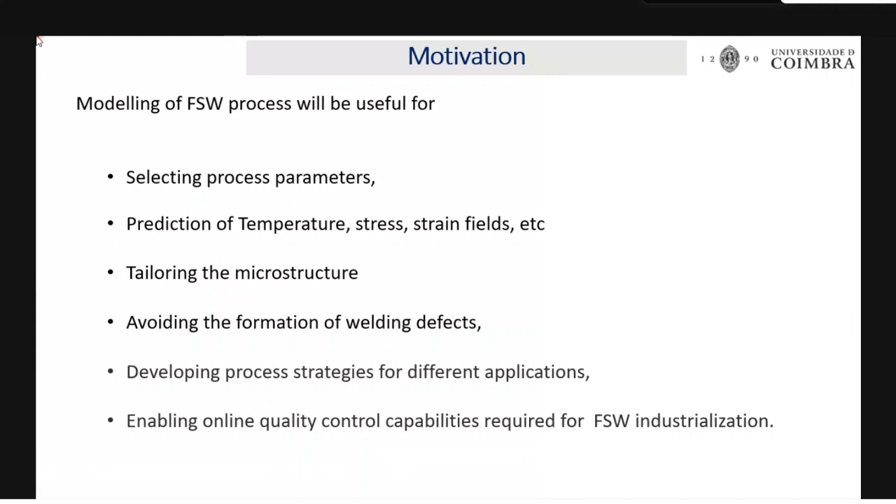So this makes FSW get to the industries in wide applications. Okay, first thing. So now we are moving to how to do the simulation. What are the things you need to know, or what are the procedures we are going to follow? The very first thing is you should know what contact conditions you are going to apply between the tool and the workpiece.

So before knowing what models are available, first I can explain the basic contact conditions, that is sticking, slipping, and the third variant is partial sticking and slipping. Sticking is nothing but the material will stick to the tool under certain conditions, and in slipping, the material tends to slide over the tool. When the material is sliding over the tool, you will have friction.

So friction is the main phenomenon during slipping conditions, and when you have friction, the heat generation is mainly contributed by friction. In sticking, the material moves along with the tool, where the angular velocity of the material and the tool is similar. In that case, plastic deformation plays a major role in heat generation. In partial sticking and slipping, heat generation is contributed by both friction and plastic deformation.

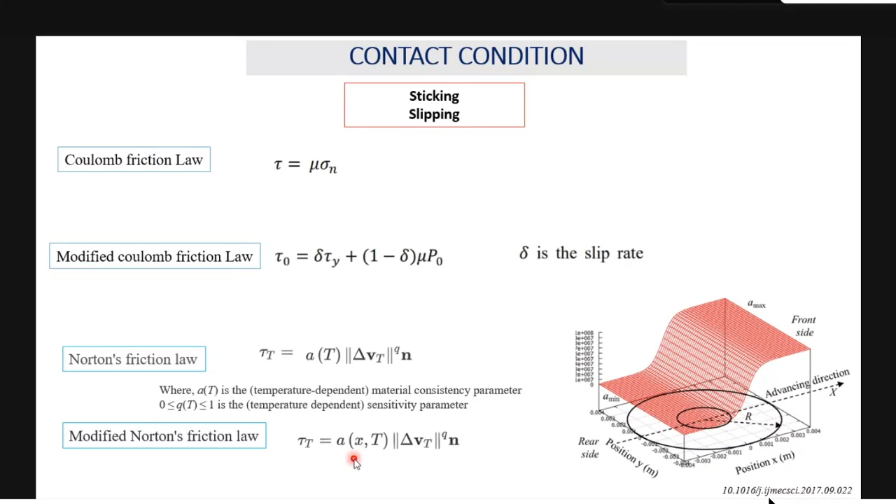And here, by changing the value of A, you can achieve sticking, slipping, or partial sticking and slipping. For example, with a higher value of A you get sticking, with a lower value you get slipping, and with a moderate value you have partial sticking and slipping. So this is about the contact conditions. You can choose accordingly based upon agreement with the literature or with your experimental conditions.

Then the next important thing is the material modeling. If you are modeling a fusion welding process, the only consideration is a temperature-dependent property, because the material property varies linearly or non-linearly with temperature. But in the friction stir welding process, you have a lot of things to analyze, because the material behaves differently with respect to temperature, strain and strain rate. So you need to accommodate all these aspects to capture the real material flow behavior.

There are some traditional constitutive models that show good agreement with experimental conditions. We can choose among them based upon data availability and the accuracy of the model with the experimental conditions. The first one is the Johnson-Cook constitutive model. This is a well-known model, very famous for simulating the hard deformations happening in various processes like compression tests and tensile tests, low strain rate tests and high strain rate tests.

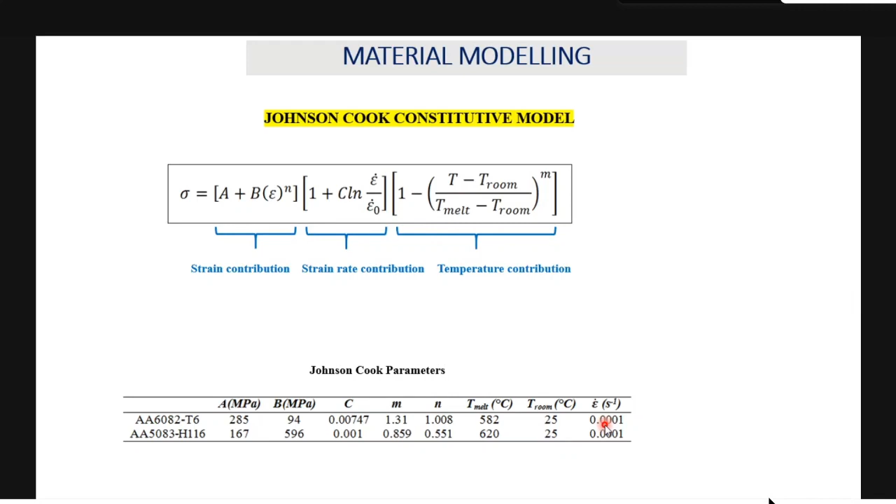The next material model is the Norton-Hoff constitutive model. This is another material behavior model. Here it is a function of the viscosity parameter and the viscosity exponent, and these are not direct values, because the viscosity parameter has further relationships, each with different parameters. Due to time concerns, I'm not explaining much about that. They use the viscosity parameter and the viscosity exponent, which is like strain rate sensitivity.

The next one is the Sheppard-Wright constitutive model. Norton-Hoff and Sheppard-Wright are both models evolved from the Arrhenius equation. They have the same origin, but the representation differs. The Sheppard-Wright constitutive model is widely used, where the effective viscosity parameter is a function of the effective stress and the equivalent strain rate. Further, this can be calculated using the Zener-Hollomon parameter. The Zener-Hollomon parameter is a parameter.

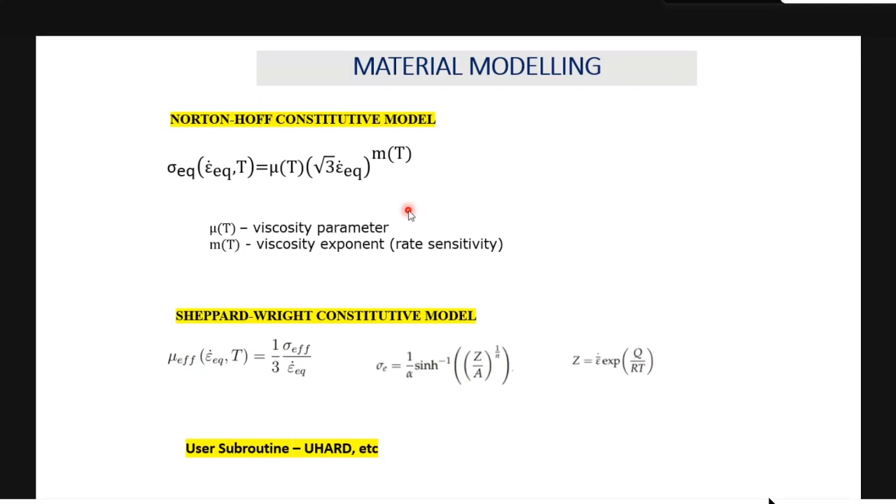Next one is the material modeling. The main one is data extraction. Of course, data extraction is a very difficult one. When you're searching for the data, you don't go directly. You can go for tensile tests, hot compression tests or hot torsion tests performed on a Gleeble simulator. Using the Gleeble simulator, you can simulate with different temperatures and different strain rates. These stress-strain curves will be used, and the data processed for this model. So these are the right strategies for taking the data for building the material model.

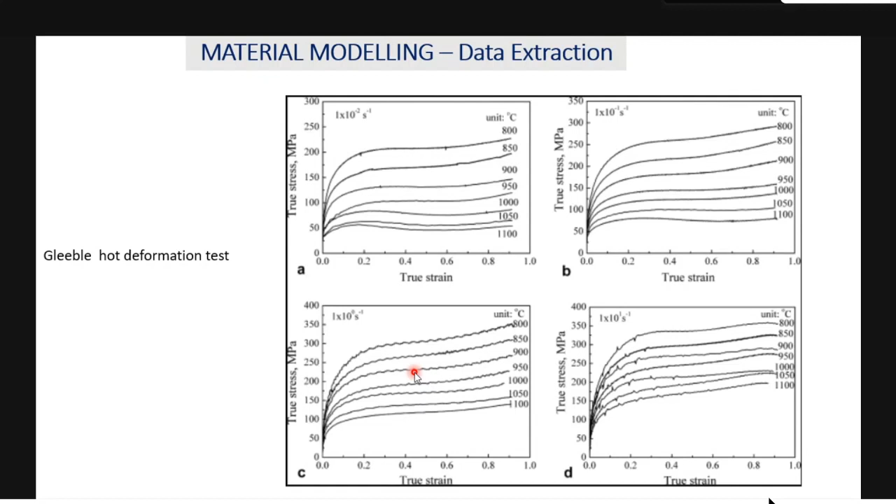Now I'm coming to the mesh part. There are two mesh formulations generally used in nonlinear deformation conditions. One is the Lagrangian and the other is the Eulerian. Let me explain this in a very short way. In the Lagrangian, the mesh moves together with the material, and in the Eulerian, the mesh is stationary, which means the mesh is fixed and the material inside moves freely through it. When you take a model, you have two systems: the mesh system and the matrix system, which is nothing but the material elements.

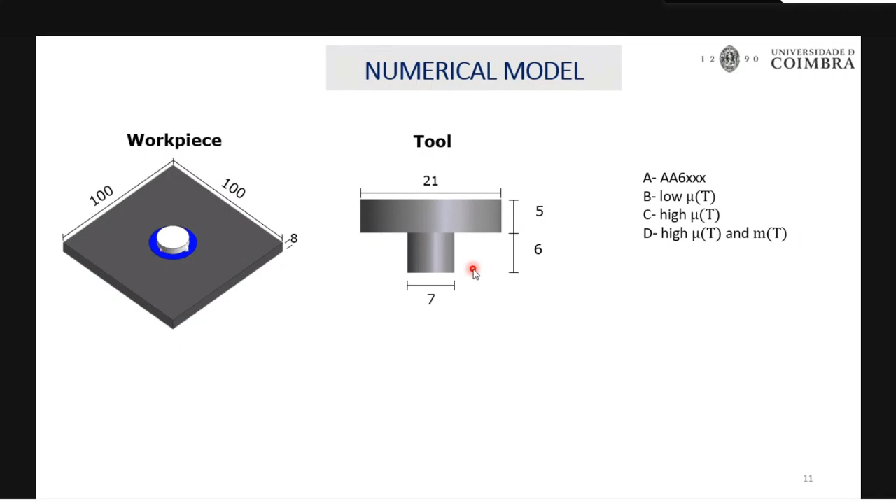And the Norton-Hoff constitutive model is used to model the material behavior, and the friction condition is based upon the Norton friction law. These are the dimensions of the workpiece and the tool used for the simulation. As I told in the previous slide, the main objective is to analyze the influence of material property. So I take AA6065 aluminum alloy, calculate the material parameter values, and use some multiplier of the viscosity exponent, for example multiplying by 2, 3, 4, 5. In this way I change the viscosity exponent value, so I can analyze the influence of the material's plastic parameters. So that is the idea.

So here I lowered the value of mu t, so that I have a new material B. This is a virtual material, not a different grade or something. If a material has this lower mu t, what will be the results? How will the material behave? In future, it can be related with any grade. For example, if tomorrow you have a new aluminum grade with this parameter, you can directly relate this result with that material without doing any material parameter prediction testing. So that is the objective.

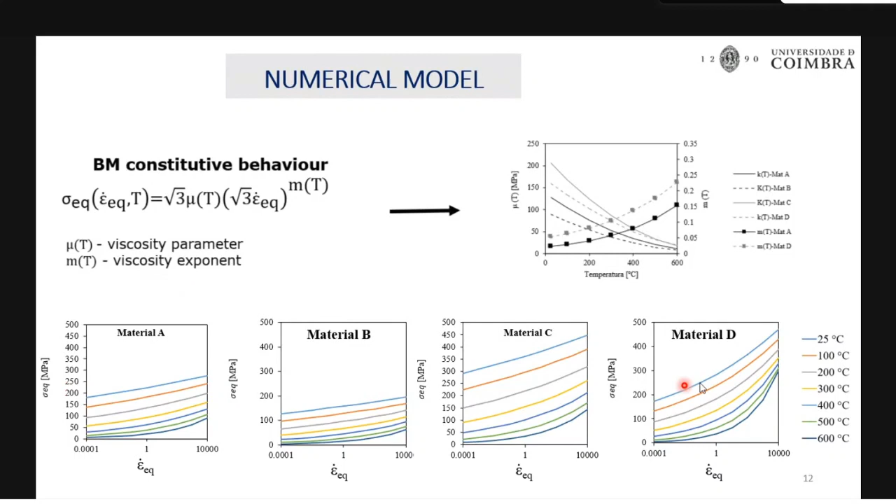Okay, so here you can see the equivalent stress for different strain rates plotted, showing how the material behaves. By changing the viscosity parameter and the viscosity exponent, the flow strength of each material is different. And these are the different process parameters used for the simulation. Keeping 600 RPM constant, I varied the tool travel speed, and with 400 mm per minute travel speed set constant, I changed the rotational speed.

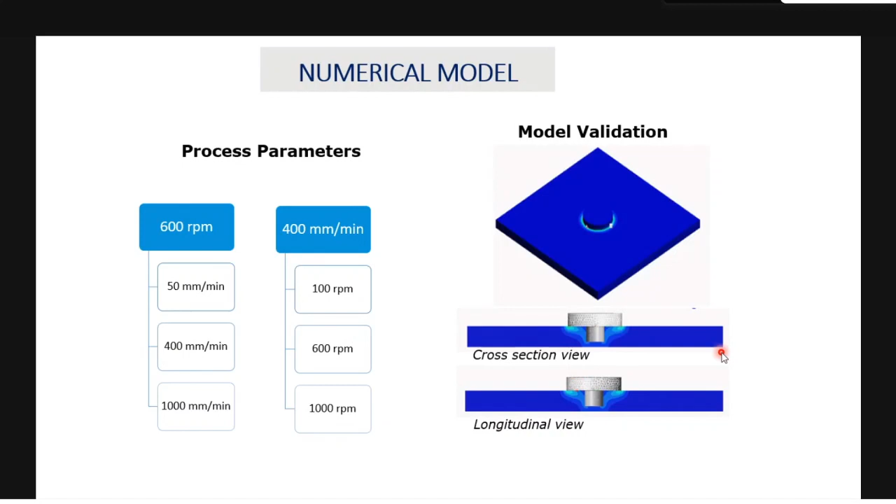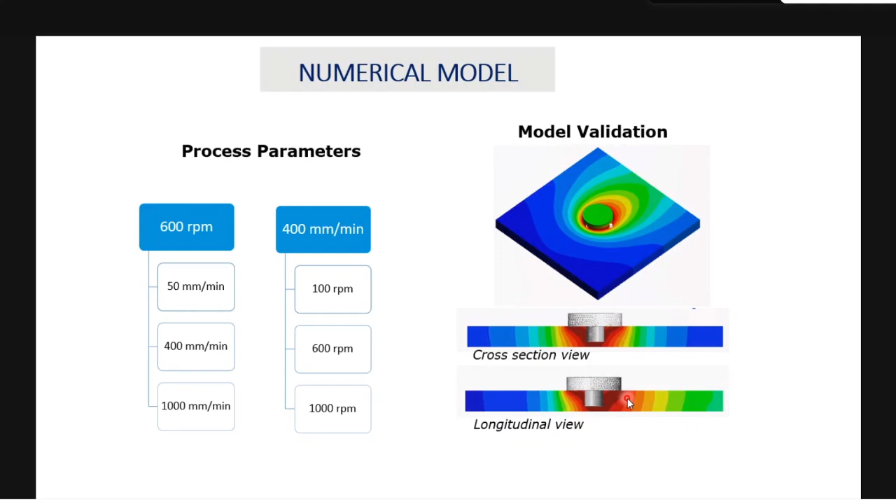So you can see here the simulation results, where you can find this is the advancing side and this is the retreating side. So the advancing side recorded a higher temperature, which is a well-known phenomenon. And here this is the longitudinal section, and this is the tool front end, and this is the rear end. So you can see a wider, higher temperature region at the tool rear, because this region has undergone welding during the previous instances. So you have heat buildup there, so you have higher heat in the tool rear. So these differences in temperature distribution are rightly predicted by using these above conditions.

So next, I'm going to check the influence of strain rate. So here you can see that as the tool rotational speed increases, the strain rate is increasing. So the tool rotation action is highly influencing the strain rate in the material. Whereas while you are changing the tool travel speed, you are not having such influences. When you are coming to the temperature predictions, during the higher strain rate you are having the higher temperature. So as the strain rate increases, we can see that the temperature evolution increases. So this is a very difficult phenomenon which you could not understand or study from experimental means. So only with this finite element analysis can we achieve this.

And you can also see that with respect to the material property, the harder material shows higher temperature because it involves higher torque and higher friction forces. So naturally it is attaining the higher temperatures. And while plotting the relationship between the flow strength and the strain rate, we can see that at the higher strain rate, the flow strength of the material will be very low, which can be correlated with these temperatures.

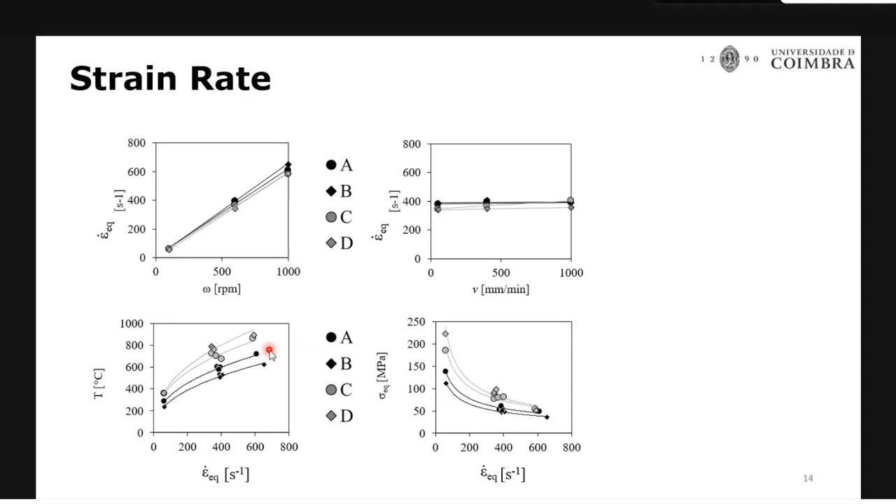So coming to the torque, it is a very important indicator. It is a material response to the tool action. So here you can see that while increasing the tool rotational speed, the torque reduces, which means that when you are having the higher rotational speed, you will have higher temperature. That's why the material softening will be bigger. So the flow resistance will be lesser, so that the torque will be lower.

And the tool travel speed is having a lower influence on this torque, and when the tool travel speed increases, you can see that the torque will be more because the tool will not be available there to make a complete stirring, and it is too fast, so that the preheat zone will be very small, and the preheat zone temperature will be very low also. So you will have a higher torque in this place.

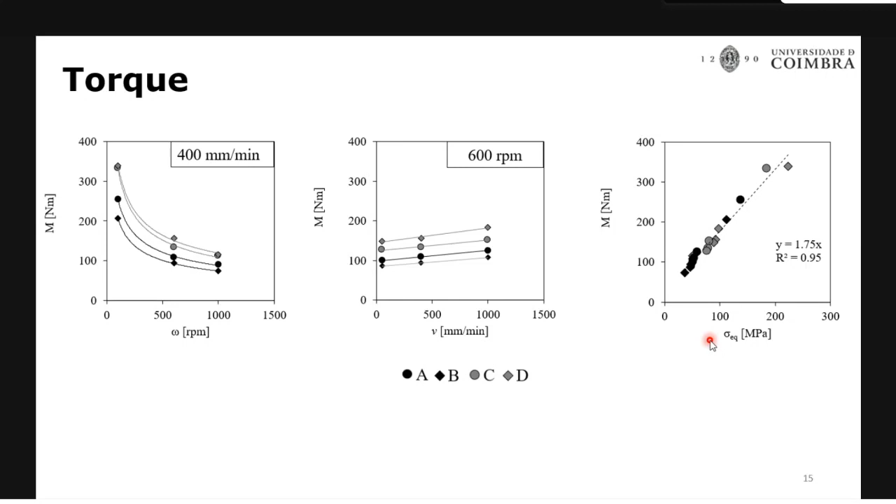So when we are plotting the relationship between the torque and the flow strength, we can find that there is a linear relationship. So the torque or the defect formation will be related to the flow strength. So if you are going for a higher flow strength material, you will have a higher possibility of defects, and we can also say that you may have a lot of problems with tool damage. Okay, and these two have the relationship. Why does this lower flow strength have lower torque? Because you are having a higher rotational speed there, and you will have a higher temperature there. So everything is agreeing accordingly.

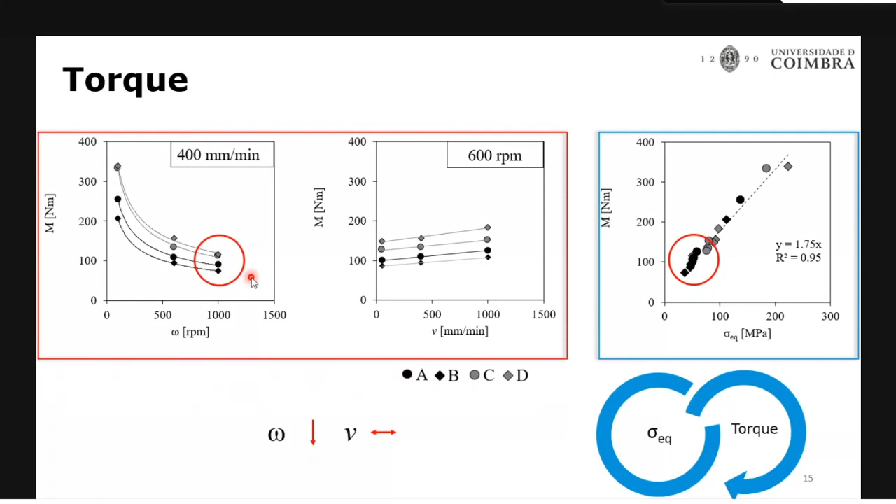Here you can see that this is the lap joint, and this is the center joining surface, and you can see that it is a little bit not clear here in this picture. You have a straight line here, which means that the joining line is still there without any alteration by the tool stirring. So tool stirring is happening.

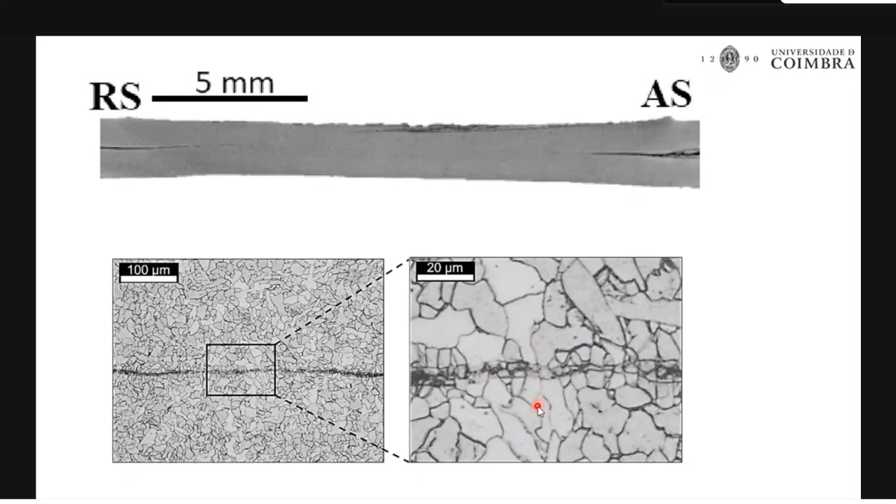So here, using the higher magnification microstructures, you can see that this line remains straight. If the material is flowed, this line will be like zigzag, or this line will be vanished. But here the line remains there, and the diffusion happens between the top and the bottom. So we can understand this with these finite element results.

So the next one is about the defect formations. Here two conditions are compared. One is 600 RPM with lower tool travel speed, and here it is higher tool travel speed. In this case, the pin tool is considered. Here you can see that some micropores are seen here in this advancing side.

And one more thing is, there is an upward material flow in the retreating side. In general, in friction stir lap welding, you will have an upward flow in the advancing side, and a slight downward flow in the retreating side. That is the conventional thing. Due to the upward flow, you will have a hook formation here, and a cold lap here. But for this case, we have a different mechanism.

Here, an upward flow in the retreating side, and you have micro cracks, micro pores, and you are not having any hook defect. So it is an unknown phenomenon. Why it happened, we don't know. So we went for the finite element analysis. So you can see these two animations.

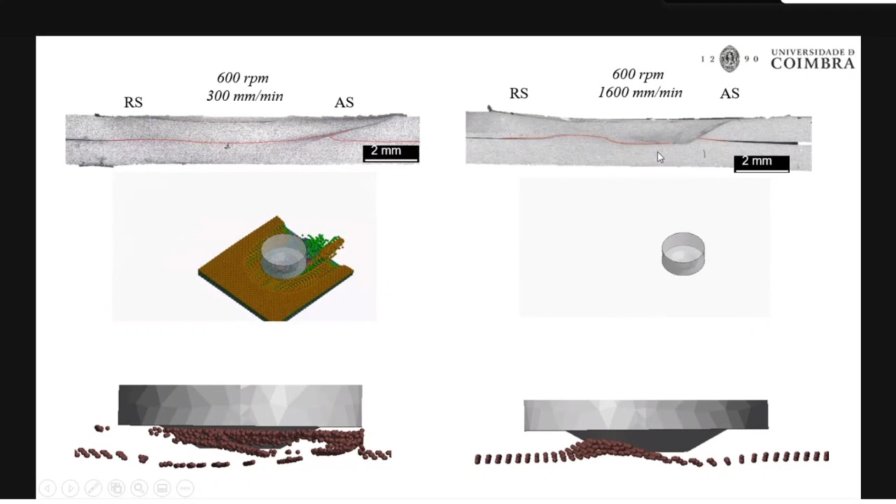Here this material is not rotating around the tool, it is just bypassing the tool. Whereas in this case, the material is moving around the tool. Which means sufficient material flow happens here, whereas here it has not happened. That's why we have an unconventional material flow and defect formation. So even with this finite element simulation, we can predict the defect formation.

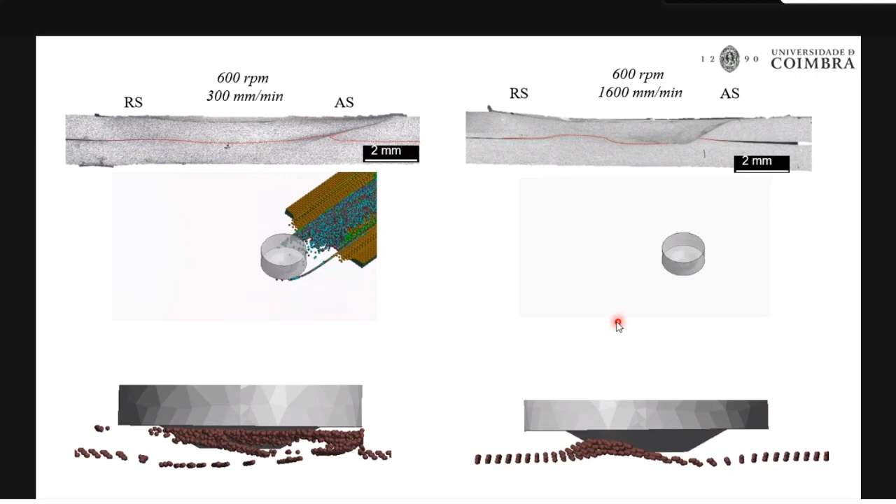So this figure shows the cross-sectional results, where the brown color dots are the markers I used. Here you can see the upward flow, which is very similar, whereas you are having an upward flow in the retreating side. Here it is not sufficiently flowed, so we are having a defect. So in this way, the defect formation is also possible to predict.

Next, I'm going to explain an interesting thing, coupling the finite element results with statistical models. When you talk about numerical modeling, it actually refers to both finite element and statistical. But in general, people think the numerical model is only for finite element or these kinds of simulations. No, statistical is also numerical. So we can use this common factor together to do some magic.

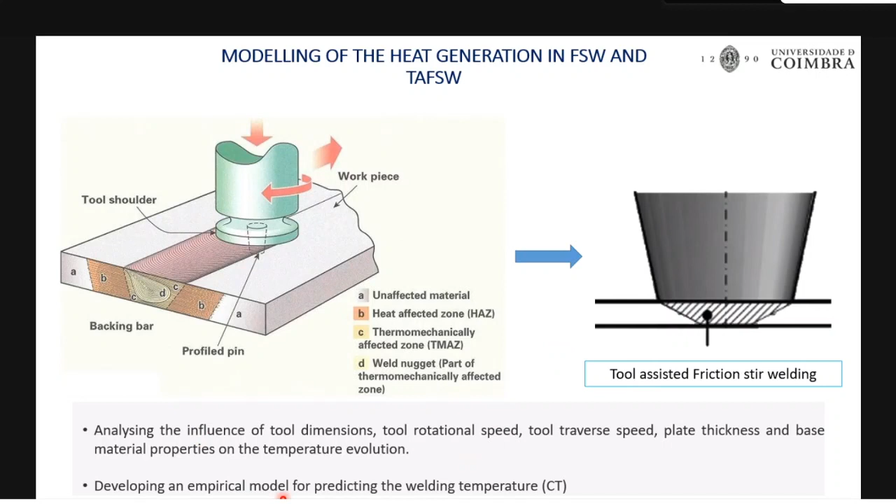So what I'm going to do here is model the heat generation in friction stir welding and tool assisted friction stir welding, nothing but with the pin and without the pin profile. Along with that, I'm going to develop an empirical relation model for predicting the welding temperature. It is a bit complicated, so I represented it in the flow chart.

First, I'm doing big data analysis, nothing but the collection of literature. From the literature, I'm identifying what tool dimensions people are using to weld. I'm using a parameter G to combine all the tool parameters. Then I'm taking the process parameters used in the literature, and doing the finite element analysis. Then with that result, I'm developing an empirical relationship.

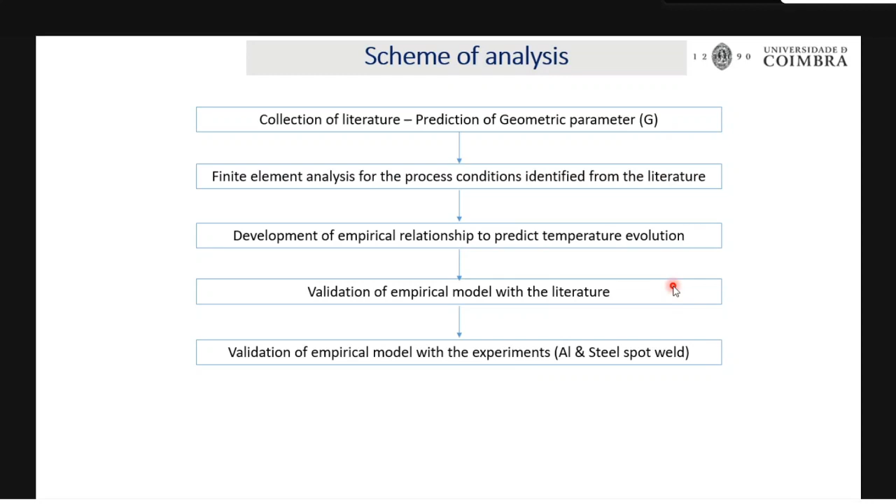Then I'm going to validate with the literature, and then experimentally with aluminum and steel material. This analysis up to here is for linear welding. And I'm checking the robustness or reliability of the model for spot welding too. So let's see that. Nearly 300 papers were collected on different aluminum grades, and these are the parameters I identified from the literature.

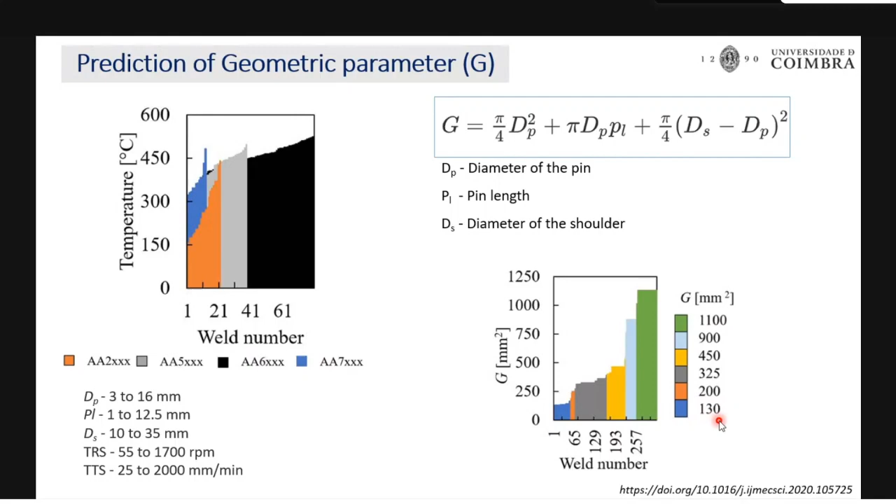And this is the G parameter, and this uses the pin diameter, pin length, and shoulder diameter. I calculated the G parameter, and I found that people are using the G parameter from 130 to 1100 mm square. So I'm using that G parameter for the numerical simulation, and these are the details of the numerical simulations which were discussed previously.

And these are the tool rotational speeds which I identified and selected for the simulations from the literature. So here also I made simulation results of temperature analysis. Here you have a non-symmetric temperature distribution, which is very similar to the microstructures.

And coming to here, we can see that as the tool rotational speed increases, the temperature increases, and similarly as the geometry parameter increases, you have the higher temperature. So this can be related that when the tool dimensions increase, you will have more contact area, more friction, so you will have this higher temperature.

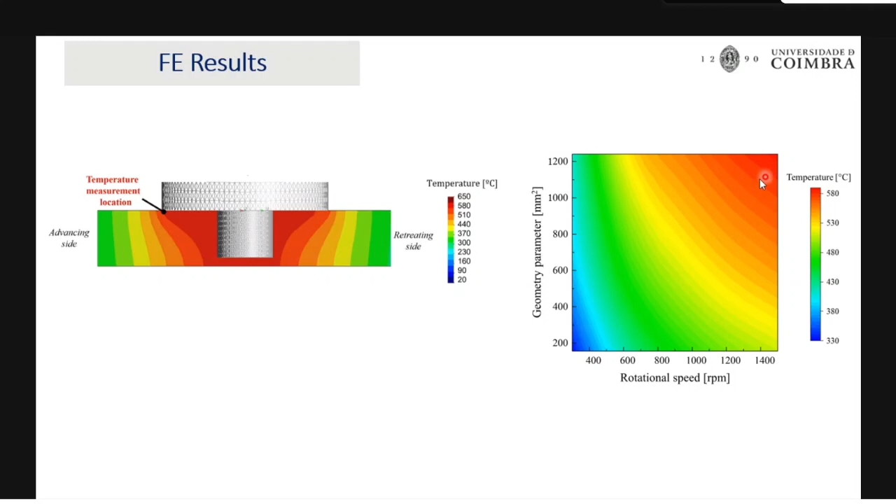So coming to the process parameter and temperature evolution, here also the shoulder diameter and thickness are compared. So here as the plate thickness increases, you are not having the higher temperatures, only the lower thickness have higher temperatures. This is the reason why the heat will be lost from the contact region or from the stir region, because it is a thicker material. So the heat loss will be higher due to the heat conduction.

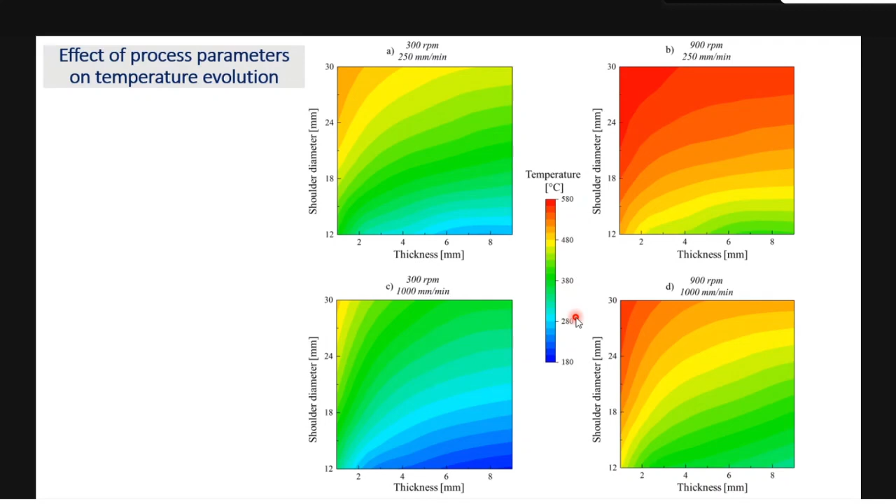And here you have higher rotational speed, and here you are having lower rotational speed. So on comparing, the higher rotational speed results in higher temperatures. So I'm not going into much detail about the process parameters. These are the well-known things. I'm just trying to convince you that this is possible with the finite element.

Then coming to the main aspect, the development of the empirical relationship. So how I developed an empirical relationship. Here I use the product of the thickness and the tool travel speed, because these two are involved in heat loss. When you are having slow welding, you will have a different heat loss, and if you are going for faster welding, you will have a different heat loss. So I'm just using the product of that. Then I plotted the temperature.

Then as the G increases, the temperature increases, which shows that the temperature is directly proportional to G. So I introduce G in the numerator, and as the tool rotational speed increases, the temperature increases. So I'm using G and omega in the numerator. In this way, the coefficient of temperature is predicted. But this is not sufficient to predict the final temperature.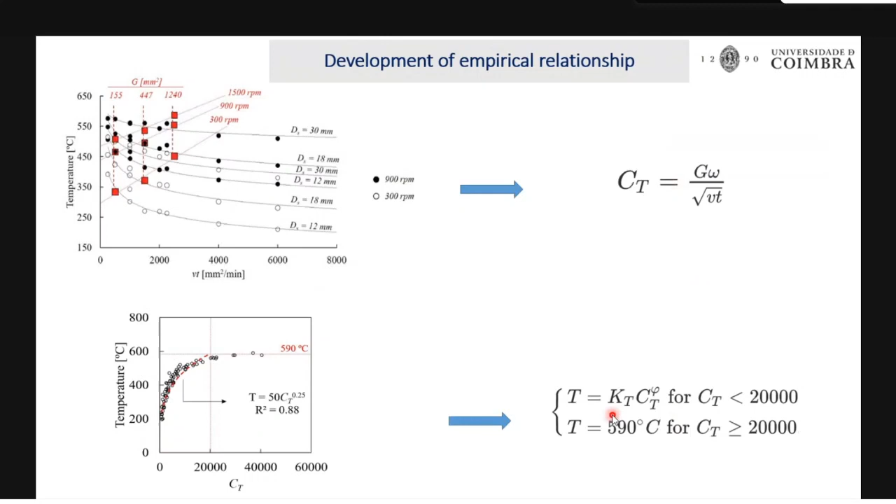And in order to get a better fitting, I also multiplied this KT and this phi value with a multiplier, because each author uses different measuring techniques and different measuring locations.

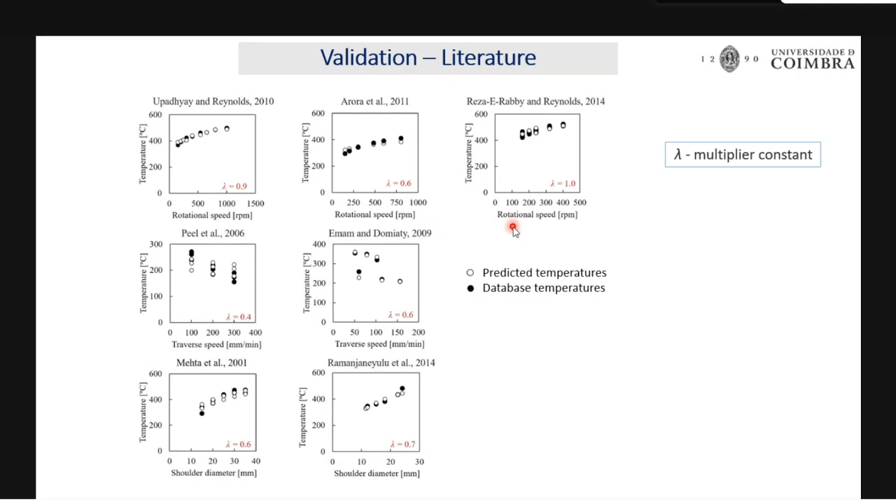So in order to compensate that error, I introduced that. So now I am going to check the robustness of this model to the spot welding. So when we are going for spot, you don't have the pin. So the pin-related terms are removed from these equations. And one more thing is, when you are going for spot welding, you don't have the travel speed. So the term V is removed from the equation.

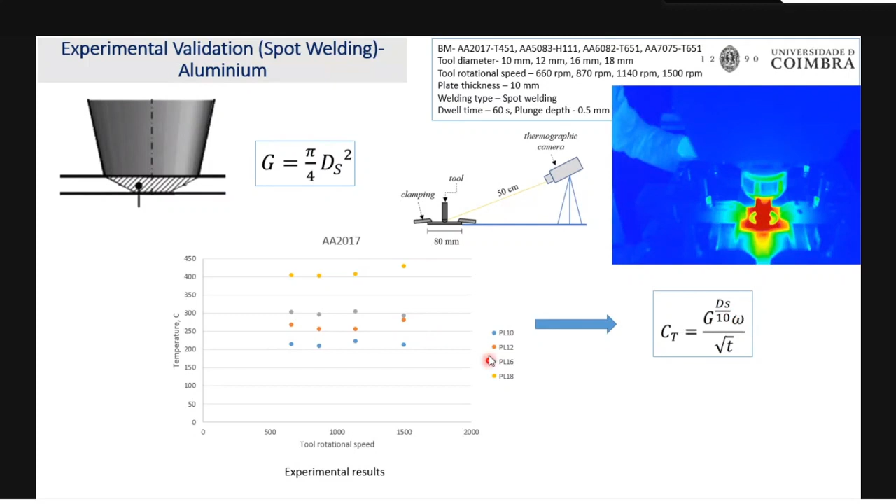And here I used ds by 10. The 10 is the thickness which I used here, and ds is the shoulder diameter. So why I introduce this is because I need to give more weightage to the geometric parameter. So here you can see that experimental condition, these experimental results were captured by using this thermographic camera, what you are seeing here. So here you can see that as the tool rotation speed increases, it is not increasing so much, whereas as the shoulder diameter increases, it is increasing a lot. So in this way, in order to give more weightage to the tool dimension, I introduced this term.

Yes, we checked that. Here you can see that as the tool diameter increases, temperature increases, and as the rotational speed increases, the temperature increases. So when you are going for steel, the influence is equal for tool diameter and the rotational speed. So I removed this, the diameter divided by 10. So this is the simplified equation, and I generated new equations for steel, because for steel, the CT will be different with respect to the temperature. And here the maximum solid state welding temperature of the steel identified is 1100.

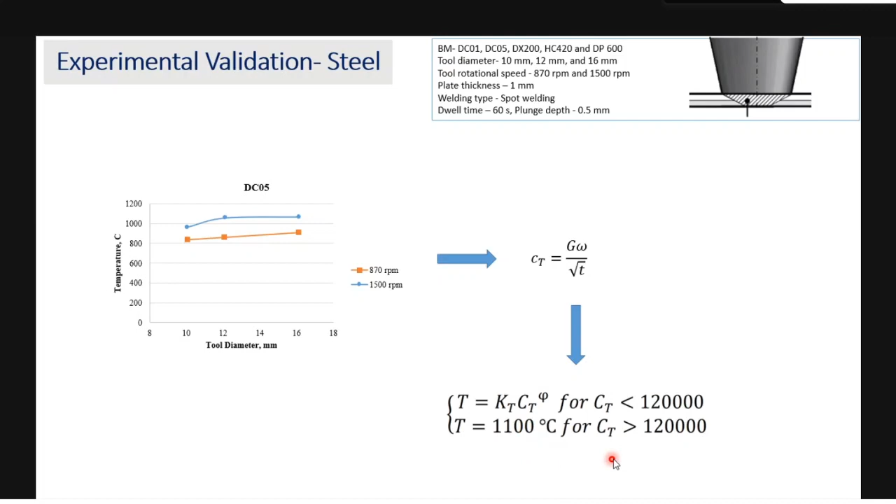Am I audible? Yes, sir, you are audible. Okay, I heard some noise.

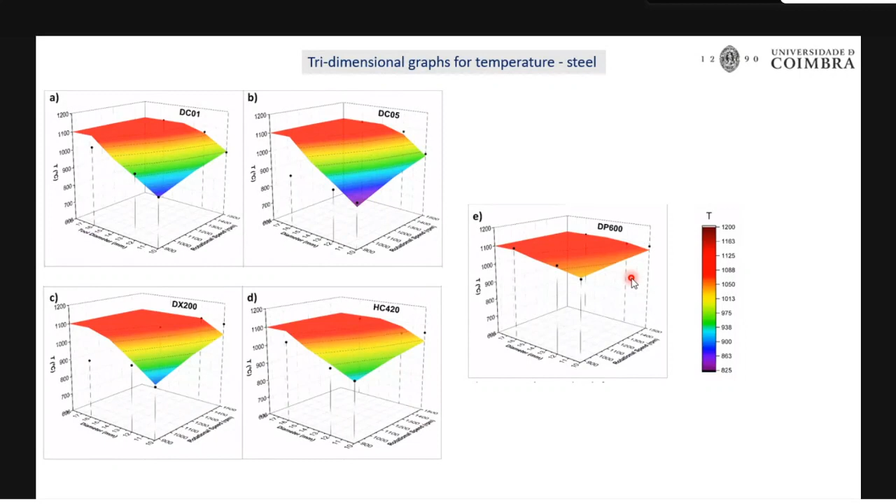Okay. So coming to here, you can see that for DC05 and DX200, we have some differences. The difference in the case of DC05 is maybe because of some error due to the emissivity during the temperature measurement. So we have a misfit here. And when it comes to DX200, we also have a misfit, and this can be related with the coating thickness, because DX200 is a galvanized steel. So in the galvanized steel, you will have a zinc coating over there. So this may disturb the contact conditions. So we got some misfit values in the DX200. So otherwise, the model is perfectly fitting with the experimental conditions.

So I'm not going to summarize the results here because my objective is not to summarize the influence of process parameters, because that is a well-known factor, and I think some of the other speakers also explained that. So my idea is only to show the capabilities, or what things you can explore from friction stir welding modeling. So the summary is, FE is an efficient tool to predict the temperature, strain rate, and strain field, which I showed in my results, and we can understand the material response. So in this way, if you know how the material responds, you can overcome the problem of defect formation and tool failure. You can reduce the cost involved in achieving the optimized joint. So these are the things.

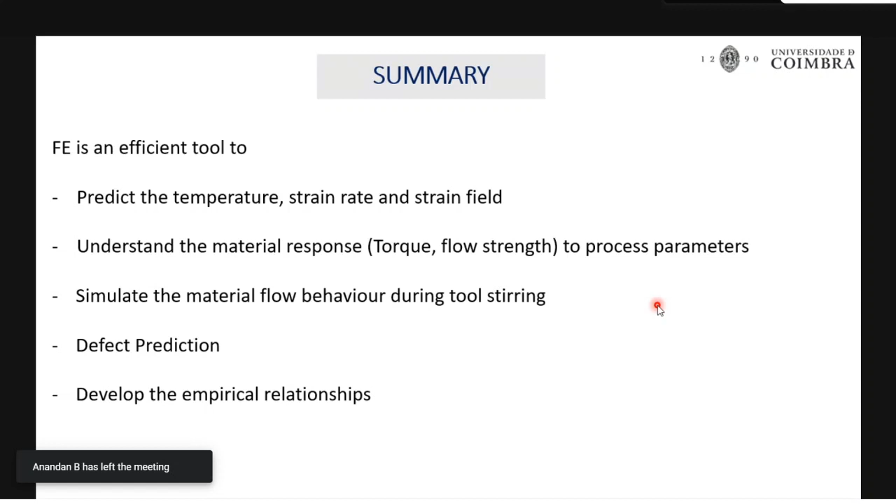And with FE, you can develop the empirical relationship with virtual material constants. You can play with the material constants by changing different parameters, so you can find the actual parameters influencing friction stir welding. Previously it was believed that the yield strength is an important parameter, then it was identified that flow strength is an important parameter, then that strain rate sensitivity is an important parameter. This only happened because of the finite element analysis. With respect to the experimental condition, it is not possible. So you can explore more about the friction stir welding process with FE, and you can take it to the industry. And that's the end of my presentation.

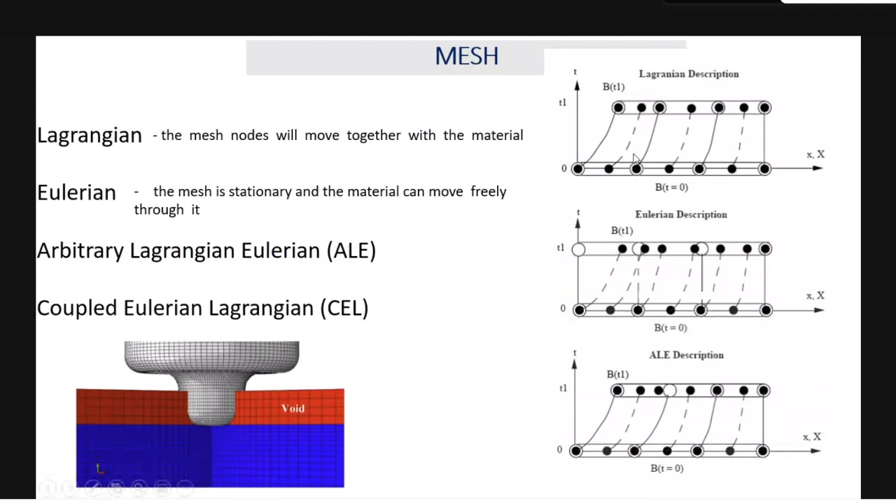Oh, sorry, I think I made a mistake there. No, it is correct. So it is not showing any more distortion. When it comes to this Eulerian workpiece, here you can find this region does not have more strain. This is an undeformed region. This is the only region going for the higher strain, so I only use ALE here. That's why I'm not using ALE here and here. And the second one is this region is going to be connected with the Eulerian workpiece.

So you will have different nodes here and you will have different nodes here. So at each incremental step, or at each tool rotation, the mesh points will be remeshed in order to support the Eulerian here. So in this way, I made my model. Did I answer your question?

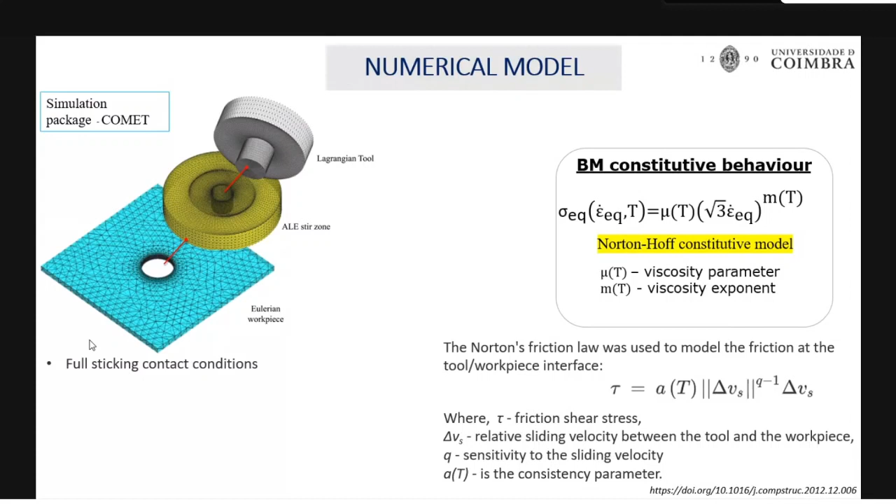Yes, sir. But one more thing, sir. You have mentioned remeshing. So is it only possible in ALE, or is it possible in Lagrangian also? I think remeshing in Lagrangian... I think it is moving along with the mesh points. I think there is no record of remeshing there. Oh, okay, sir. Just asked because you mentioned remeshing. Yeah, it is not in the Lagrangian.

Okay. And you see, if you go for a remeshing strategy or remeshing algorithm, you will have a higher computational time. So better go to some model like ALE or CEL. Better go for CEL. You will have less computational time, and remeshing is not a problem over there. Okay, sir. Thank you.

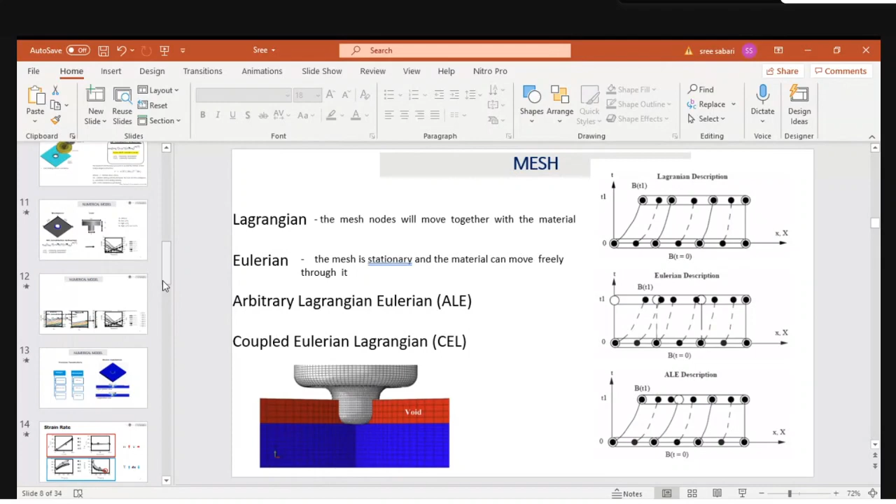Okay. Sir, I will read out the questions in the chat box. One question from S. Venkateshan, a professor in Vinayaka Mission College, Salem. Which is the best FEM tool to validate and analyze welding joints, especially FSW? Sorry, can you repeat the question? Which FEM tool is best for validation and analysis of the friction stir welding process?

Okay, from my personal experience, Abaqus. All the other tools are also equally capable, but Abaqus has a lot of capabilities. And as I told in one of the slides, when you go for Abaqus, you can write your own Fortran program to represent the loading conditions, the material model, the contact condition. So if you know Fortran programming, you can do whatever you want.

But if you go for COMSOL or ANSYS, I'm not sure, I don't know about ANSYS, but COMSOL and the software I used, Comet, do not have many capabilities on that. So in terms of tools, it's like a product: someone has a Reynolds pen, someone has another pen, and everything is going to write the same thing. But in terms of some capabilities and features, Abaqus is good.

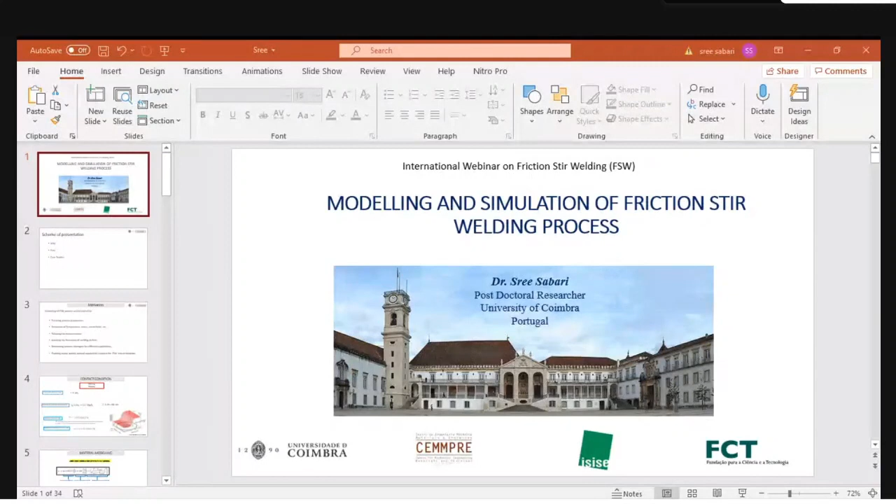Okay, sir. And there is a request from Shivaraj, sir. Can you switch on your video so that we can see you? Okay. I thought I was in video mode. I'm in, but in a very dark mode. Yeah. Hello, sir. How are you? Fine, Sabari. Okay, sir. Any more questions? So, sir, good evening. Yes.

Sir, what is a subroutine? Okay, so you are asking what a subroutine is, or which subroutine we need to use? Yes, sir. Okay, I will tell both. A subroutine is nothing but a program, like a C program. In that program, you can use some equations, parameters, values, or some kind of models, and that program can be coupled with your Abaqus model or whatever tool you are using.

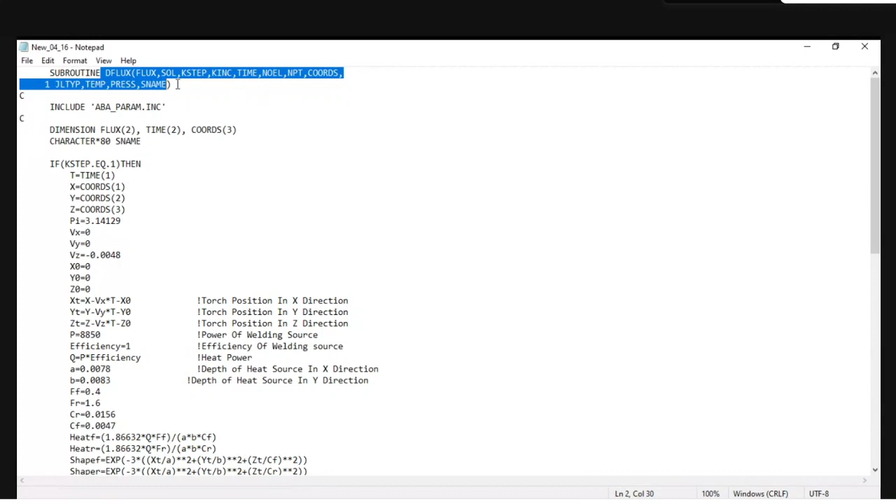This is not a subroutine for material modeling. This is a subroutine which I made for modeling of a fusion welding process, an arc welding process. In this, you can see. Are you seeing my screen? Yes, sir. So, what is a subroutine? What are the various parameters you are going to use? The variables and everything need to be assigned here, and then it needs to be explained in each step.

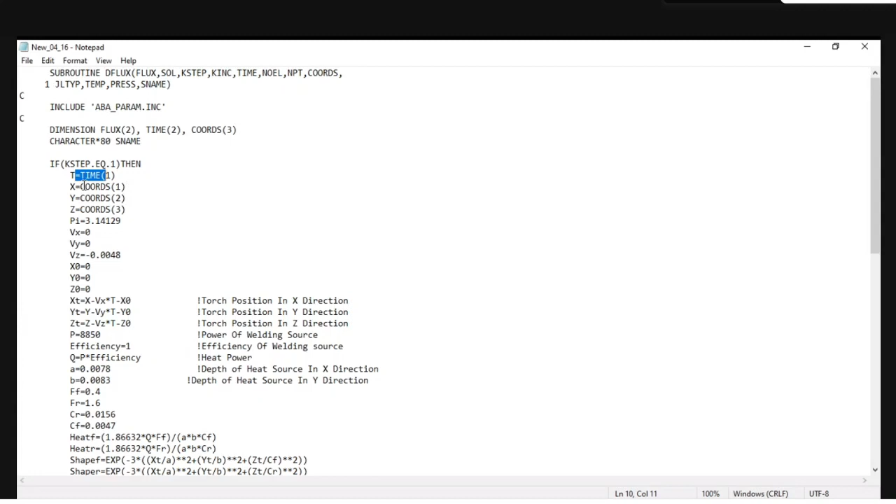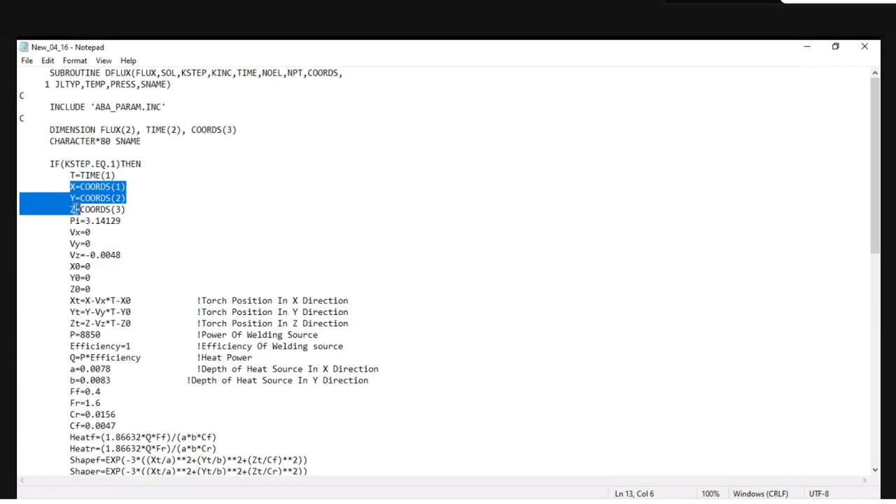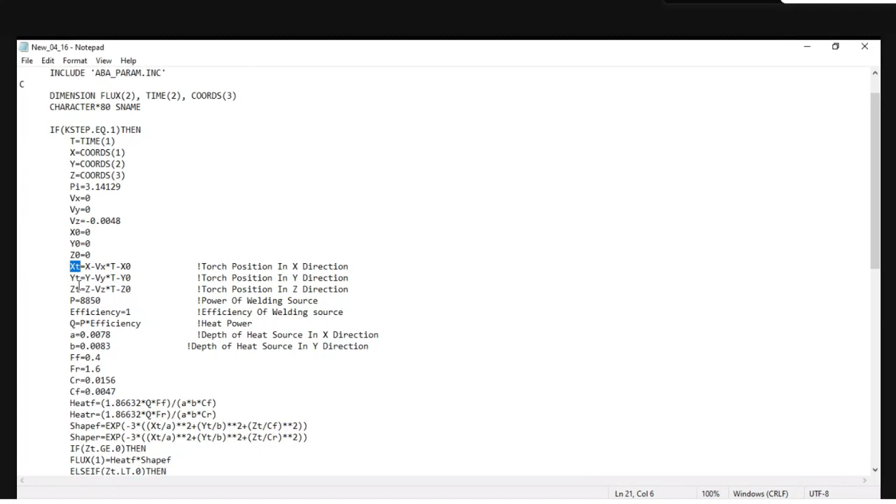For example, here this is the time, representing the welding time at each increment. This is the heat source movement, the location of the heat source: at time t+1, what is the x value, y value, z value we need to give, what is the efficiency, what is the power, and how the heat source is moved. It is moving in a straight line, or rotating, or curving along a path. And then this is the heat flux equation, how the heat flux is formed.

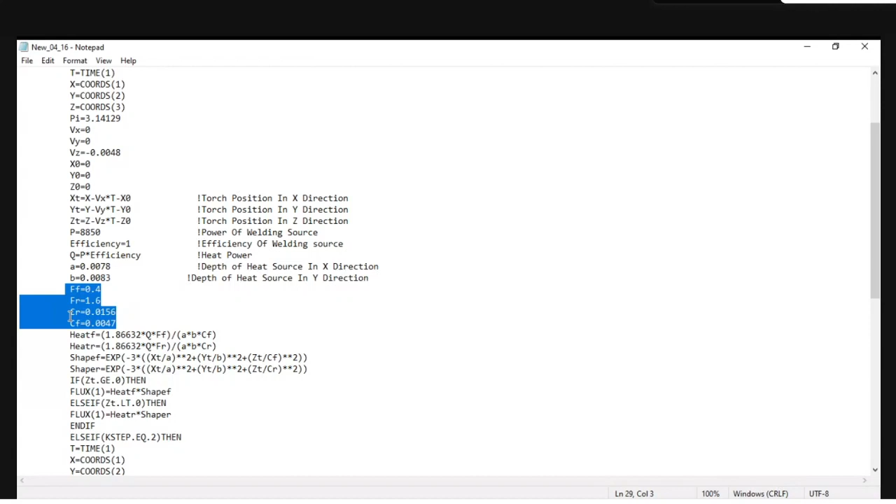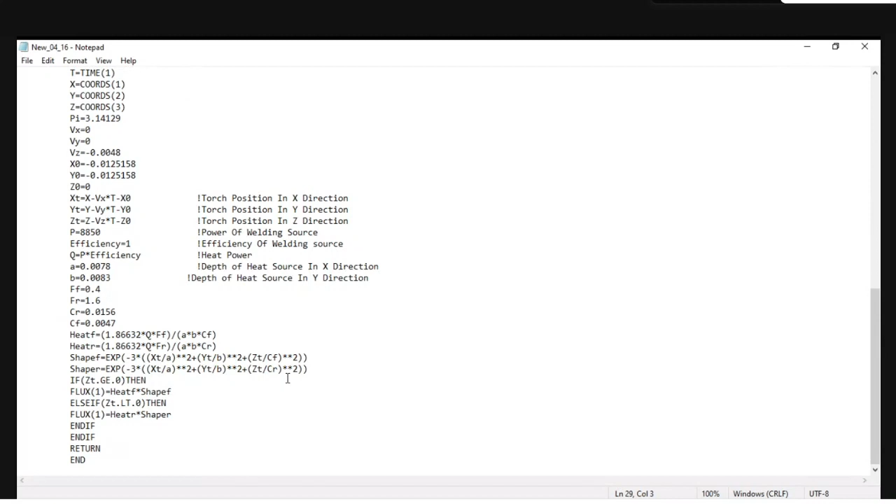This is the shape of the heat flux, whether it is a double ellipsoid heat source or a conical heat source. So you need to give everything here. At each time of your heat source movement, the simulation will come to this program and see how it needs to behave. Then it will go back to the simulation, then come here again. So in this way, it will work. Yeah, okay, sir. Thank you. Okay.